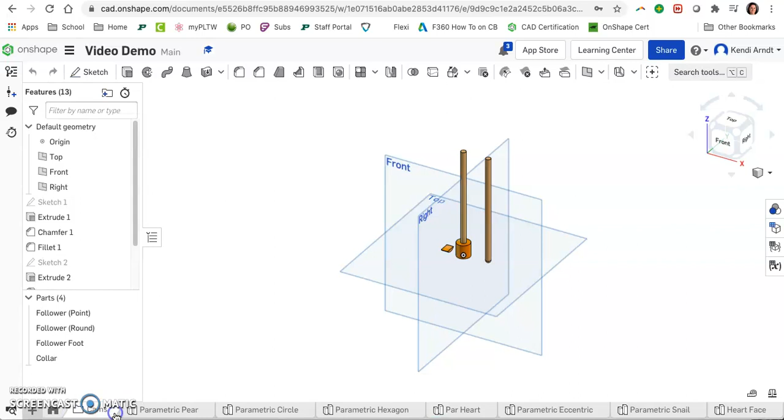Hey IED students, before we get into the assembly piece where we put the cams into the box, one thing that we need to make an adjustment on is on the cams themselves. So go ahead and open up the cams folder. So we have a pear, a circle, a hexagon, and so on.

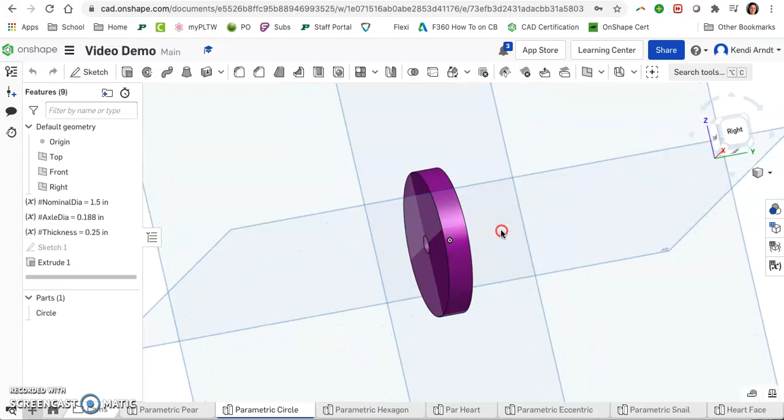There are some issues with the shapes that we have made. The pear cam, you can see the segments that we have going on because of the different pieces that we used to make the shape. The circle, if you look on the edge, it's just one continuous flat edge. There are no separations. The hexagon definitely has some separate faces.

So every 3D modeler is different. In Onshape, for us to be able to set the followers on top of these cams and have them flow around them, following them, they will not ride on the cams when they have these separate pieces like this. The eccentric cam is totally fine because it's all one face.

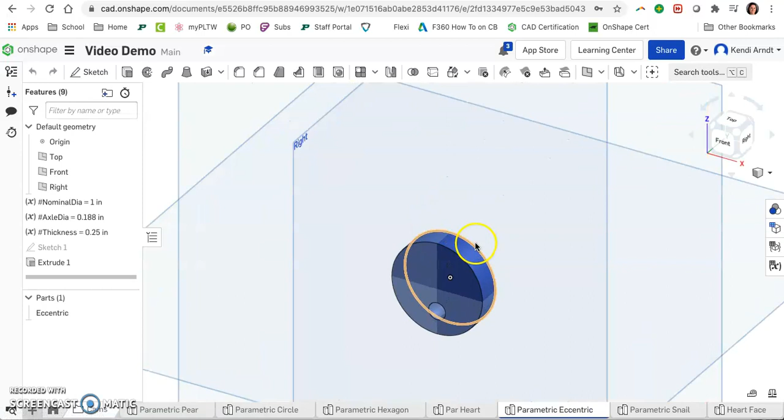The snail cam, well, we've got a couple issues on the snail cam, so we're going to need to make some adjustments to it. The parametric heart cam, you can see the different faces here. However, if you have followed my video on creating the heart cam, your heart cam is going to be fine. If you have not followed my video on the heart cam, you will need to make an adjustment to the heart cam as well. So let's go back to the pear.

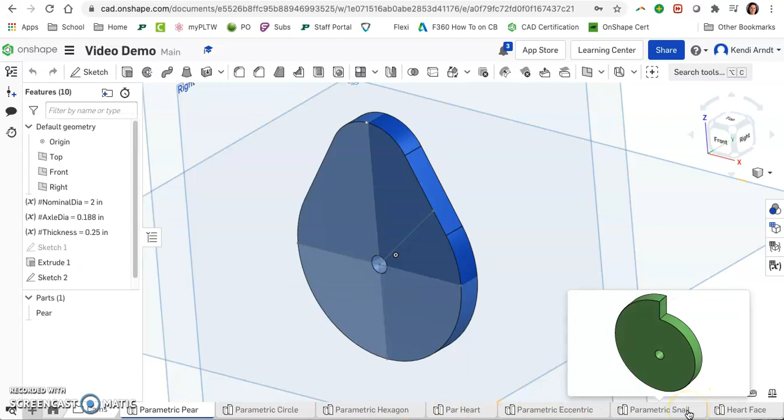So the three that we're going to need to work through are the pear, the hexagon, and the snail. You may need to work through the heart as needed. So on this pear cam, I'm going to get rid of this extra sketch that's there. I'm also going to hide the different planes that we have going on.

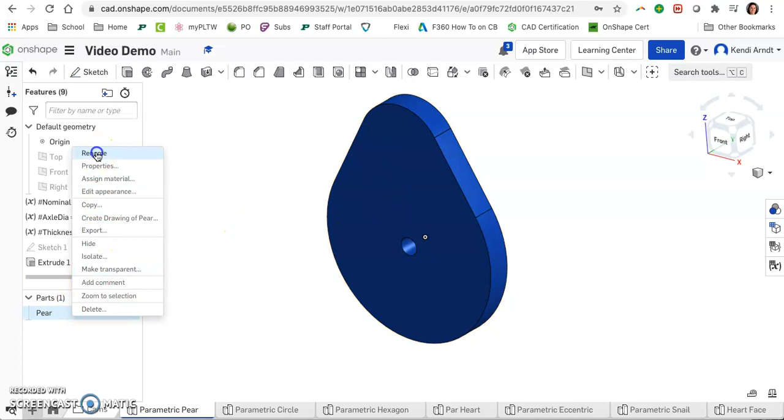So what we're going to do on this pear cam is I'm going to create a new sketch on this front face, and I'm going to create a new part on top of it. So I'm going to rename the current pear as the real pear cam. That way, if I'm ever planning to 3D print this, I would print the real one. But if I'm just trying to work with it in Onshape, I'm going to use this adjusted version.

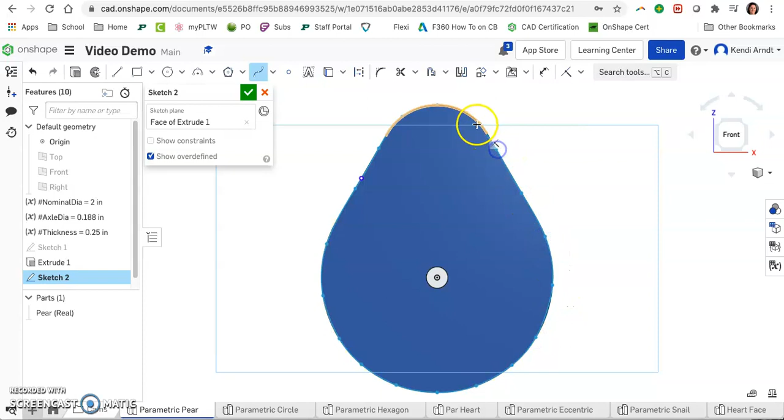So I'm going to go ahead and put a sketch on this front face. And what I'm going to do here is use a spline tool, just the regular spline. I'm going to start here right at the top, and I'm going to click a few points going around. Honestly, it doesn't matter how many points you click. Technically, the more the better, but it's also going to take longer if you click a lot of points. So we're just going to click, click, click, and back to where we started.

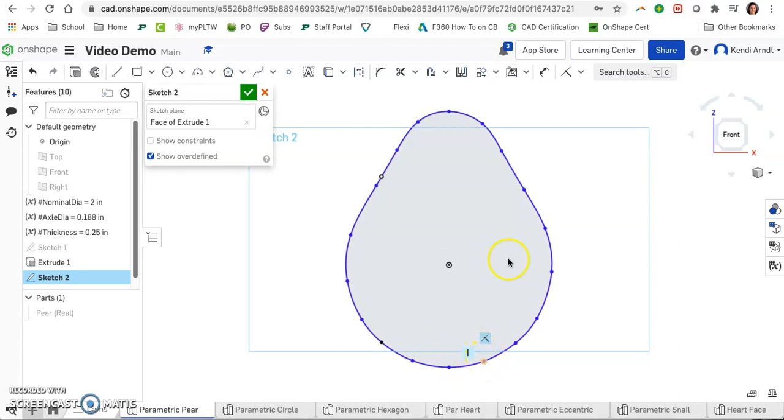I'm going to hide the real cam for now. And the thing about this is that it does include a bunch of constraints. And so we're going to delete this constraint that keeps popping up, because this won't allow us to move any of these points, and we need to be able to move them. So hover over, click on that. It's a coincident constraint. And delete those coincident constraints.

So hover over, click, and I use backspace or delete to delete them quickly. Otherwise, I believe you can right-click and choose delete sketch entity. Okay. But for me, using a key is a little bit faster. So for us to create this singular face, I'm going to click and drag and just bring these points out or off of the original.

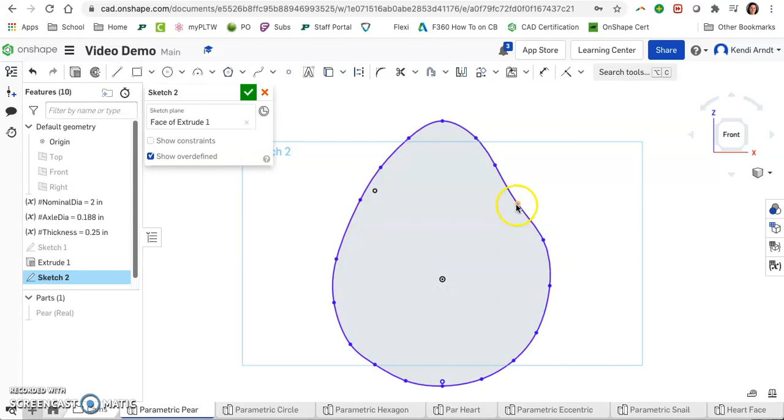Oops. And if it replaces, what it does is it just adds that constraint back on. So we're kind of changing the shape a little bit. As you can see, that's happening. We're definitely changing the size, so it's no longer a parametric cam setup. However, what's important is that, go ahead and delete that, see if that fixes it. It did. What's important is that we get this singular face along the outside.

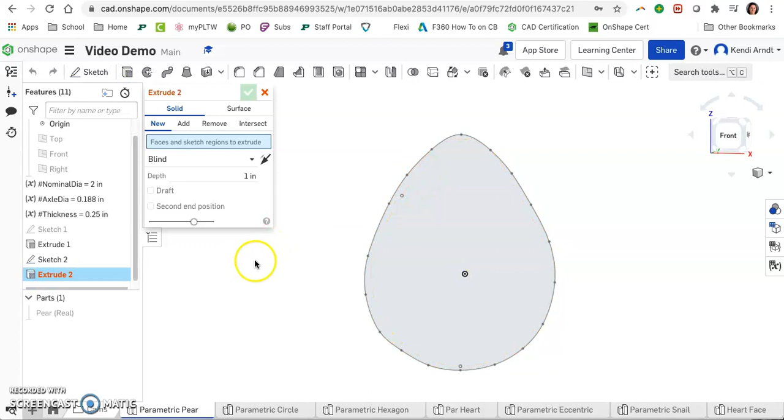Okay, so it kind of looks like an egg at this point, but it still is roughly the same as the original pear, roughly. So let's go ahead and check mark that, and we will extrude. And I don't want to extrude the original cam. I want to extrude the sketch we just used. So click on Sketch 2 there. Make this 0.25 inches. Make this the thickness parameter, I suppose. Make sure it says new there.

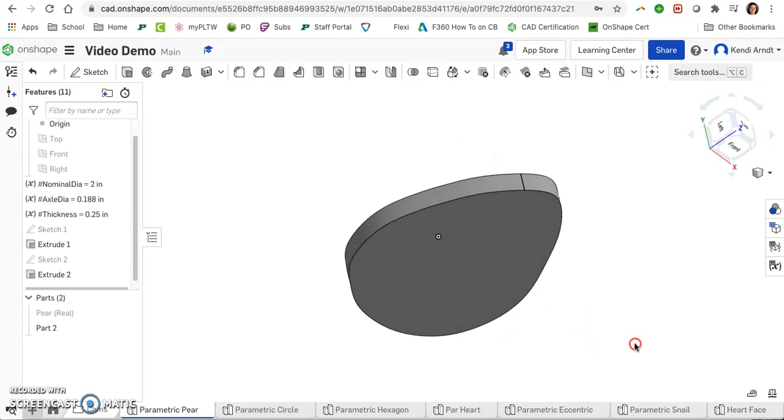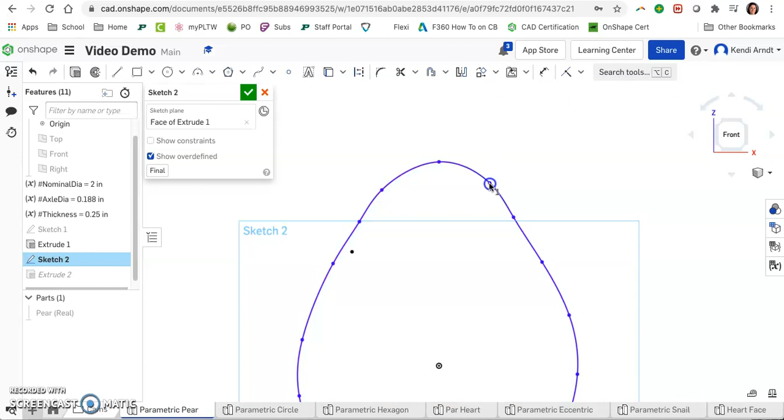And now we have this new, and as you can see, we actually still have a couple of issues there at the top. Okay, so I can still see these separate faces. So I'm going to go ahead and re-enter Sketch 2 and try to, yeah, there was one that I didn't move. So yeah, they really do have to get moved off of the original cam. So just make sure they stay off of there. All right, that looks pretty good. I mean, roughly. And then look, those separate faces went away.

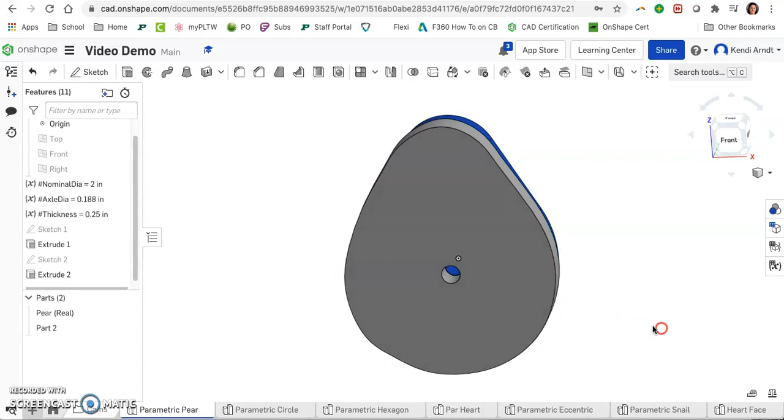All right. I'm missing the hole in the center though, so let's make sure we go back in and click Use. I might have to review. There we go. So use that. Aha. So now we can see our new cam sitting on top of the original cam, and we have the hole there. So I'm going to rename this pear blob. So that's the part that we'll actually use in our Automata box assembly.

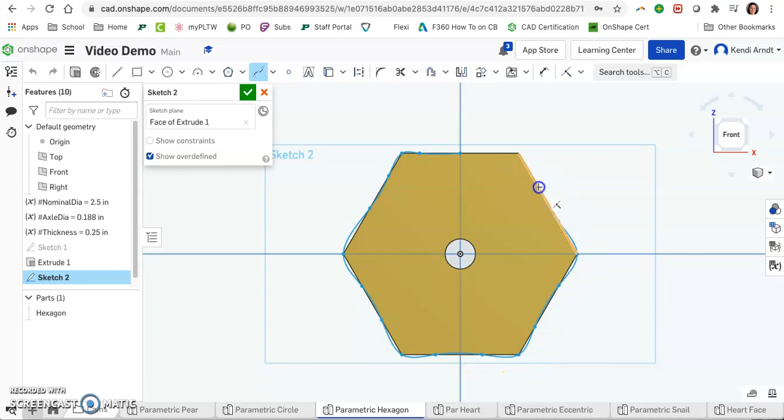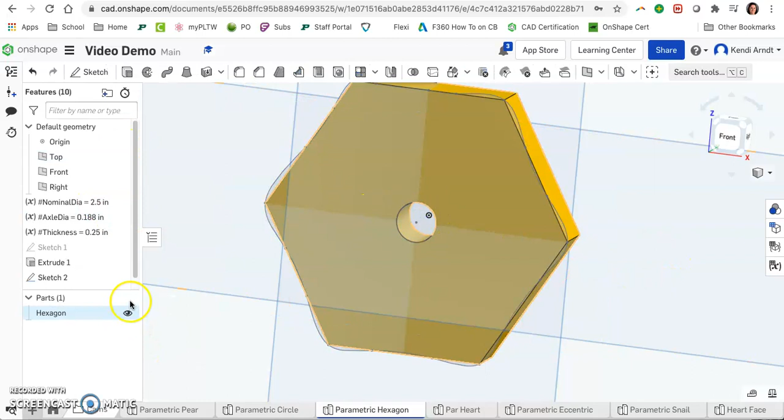We'll do that same thing with the hexagon, where we put a new sketch on the front. We use a spline, clicking around, just kind of getting the gist of it here. And so yeah, it gets kind of wobbly, but that's okay. So looking at that. You know, for this one, I'm going to give it a shot. I need to make sure I use the hexagon's hole. There we go. I'm going to give this one a shot and see if I can extrude Sketch 2 with that thickness and just see what it looks like.

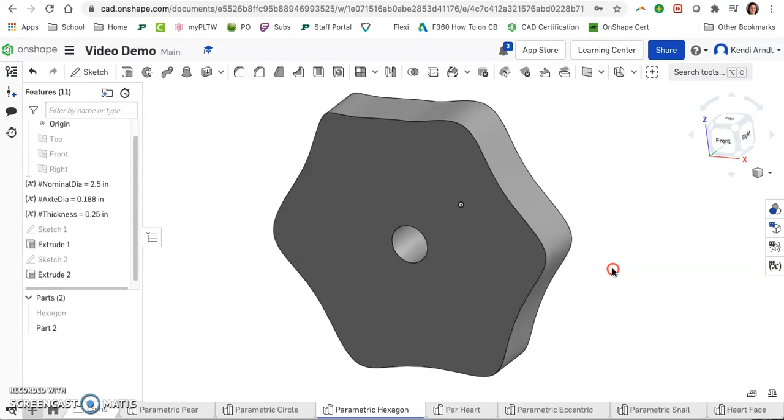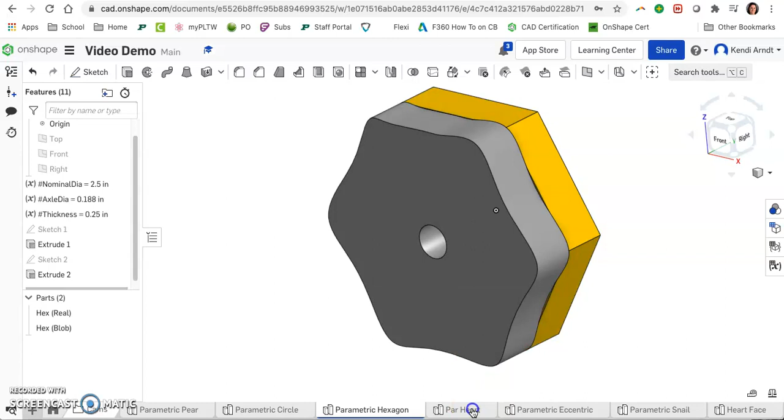I'm going to hide these planes. Yeah, that actually looks really good. So without having to move the spline points, we have this nice singular face on this hexagon. So I am definitely going to use that. Hex blob. Rename the real hexagon. Okay, all right, so that looks really good. As I mentioned, you don't have to do anything to the heart cam if you followed my video. However, if you did not, then you would definitely want to add that spline and see if you can get that to tidy up. And do the same thing with the snail cam.

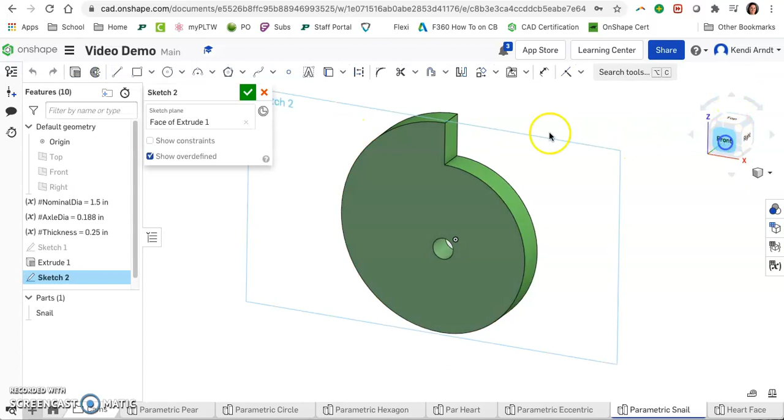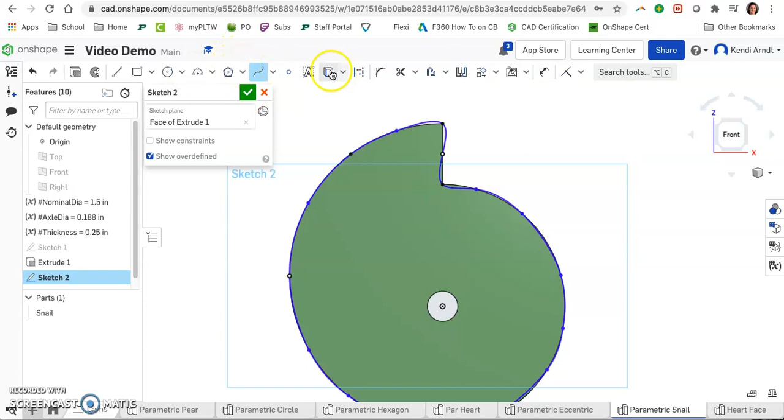I'm going to hide the planes here, and then I'm going to add a sketch right on the front using a spline. I'd like this to be nice and tidy like the hexagon was. So I'm going to avoid clicking like some of the constrained spaces there. See if I can't make this happen for us. Make sure to use the hole that's on the original snail cam. Name that snail real. And hide it just for a little help. We'll extrude Sketch 2. Make sure it says new. Get it to that thickness. Look at that. That looks awesome. Okay, cool.

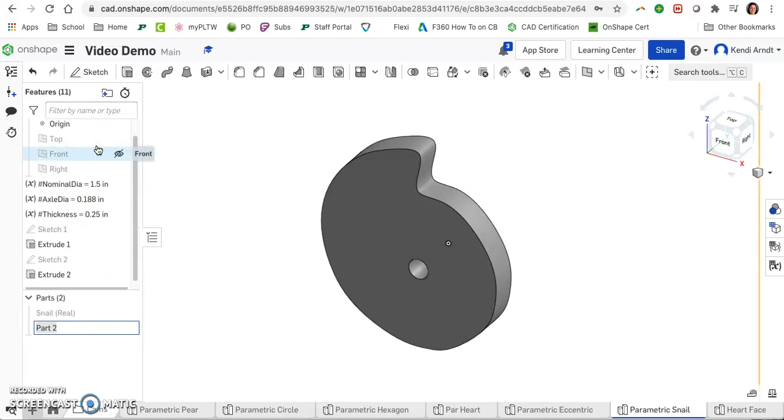So, as I mentioned, make sure to go through and change all of your cams using that spline. Add a new extrusion onto them. Rename them so you know what we're putting into the assembly. All right, get your cams ready. In the next video, we are assembling the cams onto the axle.